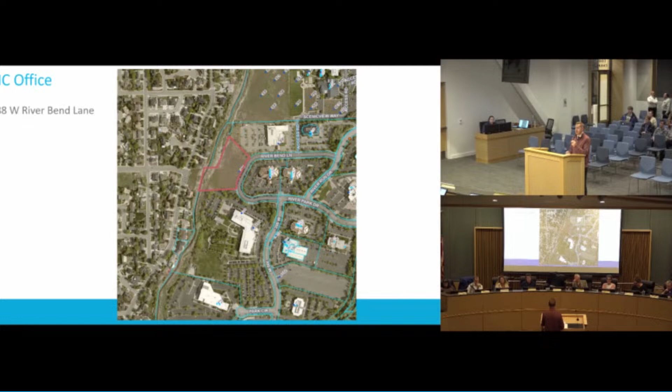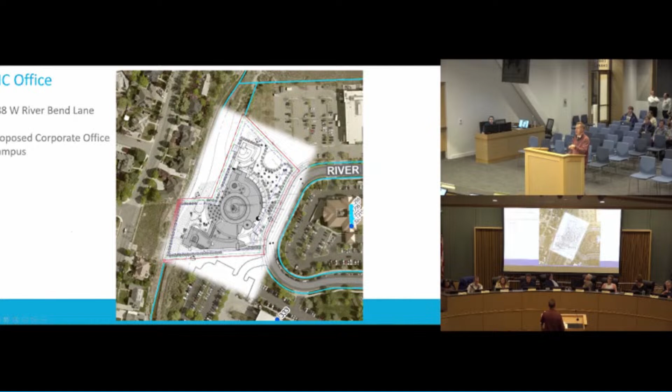So what we have here is the site plan, how it lays out on the property. You can see the main building in the middle here—that's going to be their main offices. Up to the north is kind of the head office, CEO office, meeting space there. And to the south is more of an amenity for the employees. This is all connected through pedestrian walks, and underneath is a parking garage.

So the zone, like was stated, is the RB&P zone. To the north is the PF zone—there's a school up there. That property kind of goes along the border between Provo and Orem, and then, of course, to the west is Orem City.

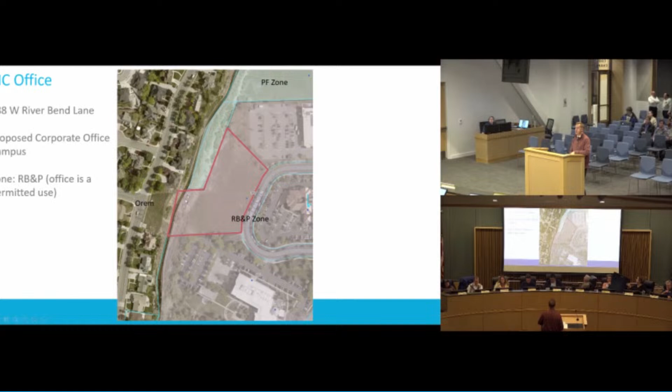The office space is a permitted use. So what we have here is an office building, but not a traditional office building—there's only 22 office spaces within this structure. There are green roofs, lots of landscaping. It's kind of an open and green design.

So that's an aerial view looking towards the west, towards Orem. That's it to the north. You can start to get an idea of building height compared to everything around it. The majority of this building is about 37 feet high, minus the stairwell towers that bring you up to the roof garden spaces—these three here. The majority of the building is just two stories, about 37 feet.

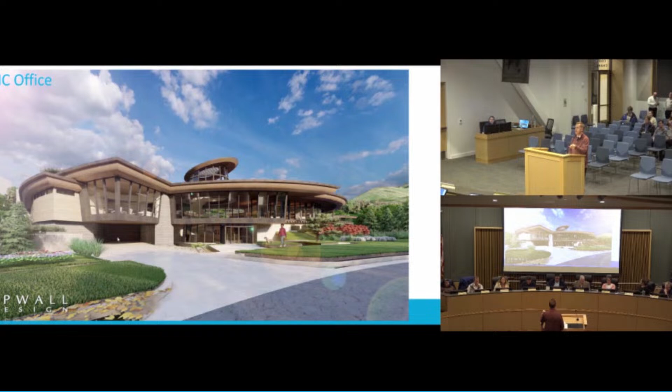And then from the street—this is along Riverwoods Drive—this is what it'll look like from the street. You've got your main entrance there, the parking entrance to the south of that. And then here's one of the renderings for the main central structure. This is the main floor with the offices surrounding; you can kind of see the office spaces surrounding this open daylight amenity.

So there's a few concerns that came in on this one through phone calls. I don't think any came through email, but I did receive a few phone calls. They were all from Orem residents up above this project on the hill to the west, just asking questions about how tall the building is going to be, sound, light, things like that. But those are the only calls or emails we had on this.

This did not go to a neighborhood meeting because it's just a project plan. So only legislative things are going to those neighborhood meetings now. But staff is recommending approval on this. We think it's a great addition to the Riverwoods Business Park. We think that it would be a benefit to the city, and I'm prepared to take any questions you might have.

All right, go ahead if any commissioners have any questions. Is this use for an existing company, like a company wanting to put their headquarters here? Yes, exactly. The headquarters for KMC. They're a real estate management business corporation. This would be their headquarters. Currently located in Provo? The owner lives in Provo. I'm not sure where their headquarters are. Got it.

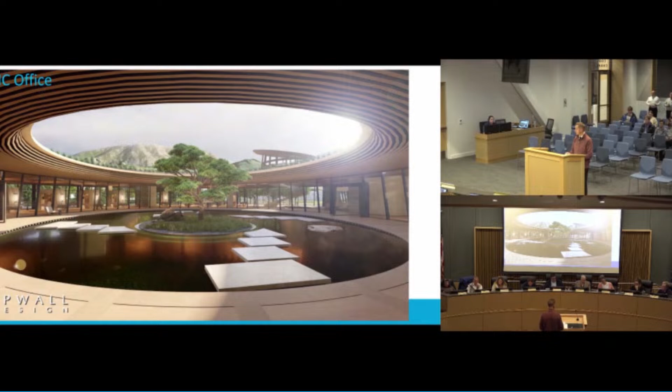The conclusion on the staff report says that the overall value of the building and site far outweighs the small gap in parking numbers that are imagined for a standard office building. Is that the reason we're seeing it, because the parking isn't enough? Why are we reviewing this? It's just because it's a commercial project plan on a site that's over 3 acres. Anything over 3 acres in size comes to you. The gap in parking, the parking standard, is based off of just a blanket gross square footage.

In a typical office building, it may make sense to park it at one stall per 250 square feet. But I think if you look through the floor plans of this, you'll see that there's only 22 offices here. You've got about 5 spaces per office. I think it's sufficiently parked.

Okay, so is that something we would need to give an exception for, or do you have the authority to say we don't need to use the same numbers for parking? Do we need to say at some point that we're okay with the parking? Yeah, that is a key point for the planning commission to decide.

Okay, and then my other question is, I noticed that the parking is underground, and I'm wondering if, right next to the river, that's even structurally feasible to have underground parking. Good question. So yeah, this did go through staff review. Engineering and Public Works have signed off on the project plan for this. There's a full set of civil drawings. Okay, that was surprising to me.

Okay, thank you. I have a question in terms of the size of those 22 or so offices. How large are they? Can they be subdivided further? Is there an end-around where you get under the parking requirements? That's a good question. I don't know the exact size, but looking at the main level floor plan, I don't see a way that those would be easily divided. But I suppose that's possible through a remodel building permit. At which time we would kind of reanalyze the whole project, right, if they came back with a remodel.

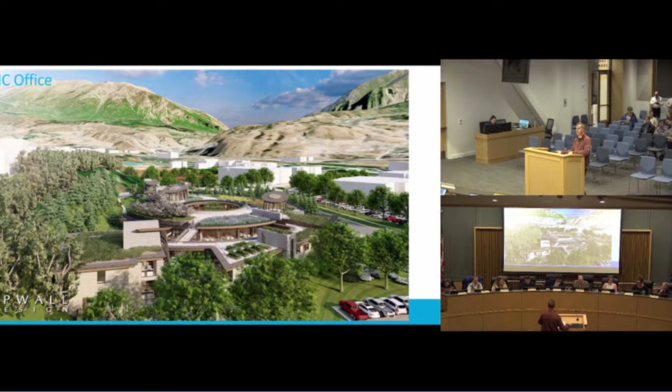One question I have that wasn't super apparent from the sketches, maybe it was written somewhere and I missed it, but the property goes right along the river. It shows that there's like some trees planted at the part of the property that goes along the river. Is there a plan there, is there a trail currently going there?

So yeah, you're probably speaking about that little portion. Yes, this little section. It's not a river, it's a canal. It's the Provo canal actually, private actually. Okay, but they are respecting the distance from that either way. Cool.

And what building is that to the left? Is that Qualtrics or Vivint? South is the Qualtrics offices, yeah. Okay, cool.

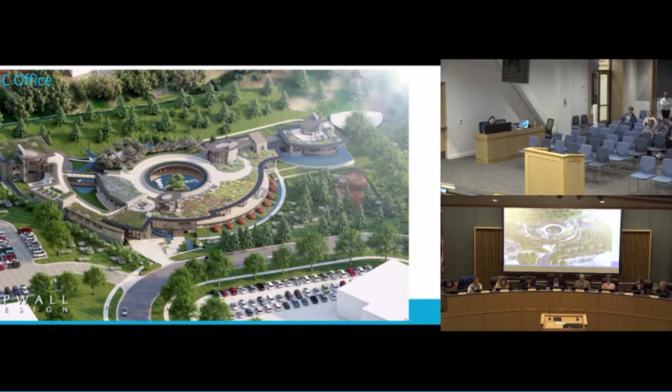I can make a motion on that. Thanks, Jonathan. I move that item 1, Josh Arrington requests project plan approval for a new 75,000 square foot office building on a 3-acre campus in the R&BP zone located at 388 West Riverbend Lane, River Bottoms neighborhood, be approved, with no caveats, but with the addition that we are also approving the building materials.

Any discussion on the motion? Let's go ahead and vote, or do I have a second? I'll second. Commissioner Knudsen gives us a second. We'll go ahead and vote on it. Commissioner Hill, aye. Aye. Aye. Aye. Aye. Aye. All right, item number 1 passes unanimously, 9-0. Let's go on to item number 2.

Dudley and Associates request project plan approval for a new 3-story office building in the SC3 Regional Shopping Center Zone located approximately at 4951 North Edgewood Drive, River Bottoms neighborhood. Mr. Ardmore, could we also read in item number 3? Item number 3, Jay Roberts requests approval of a zone map amendment from the SDP1 Village at Riverwoods SDP Overlay Zone to the SC3 Regional Shopping Center Zone, in order to construct a new mixed-use office and commercial building located at 4951 North Edgewood Drive, River Bottoms neighborhood.

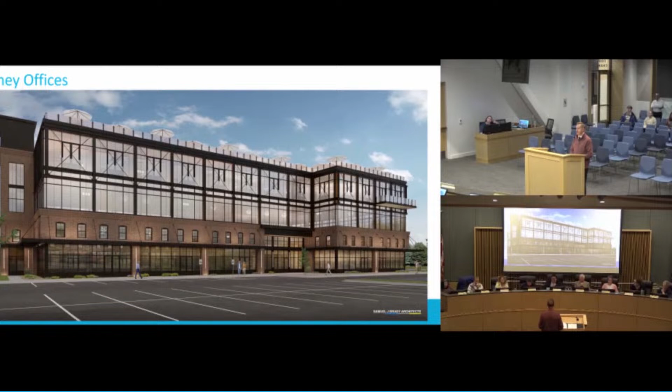Aaron, I have a couple questions. First, just out of curiosity, in the upper right-hand corner, what is that they're showing with the kind of brown and the gray? That's just landscape space. I think it's a ground cover and then just walking paths, trees and shrubs. Okay, just the gray kind of waves - I was curious what that was.

Do you know the distance between the building itself and the townhomes adjacent? Yes, I believe it was over - the applicant probably has this off the top of his head, and would be quick to answer it. But I think it was over 30 feet from the property line to the edge of the building. And then you can see that there's additional setback from the property line to that first townhome, townhome 1 there. So there's probably, I would imagine, about 40 at least feet.

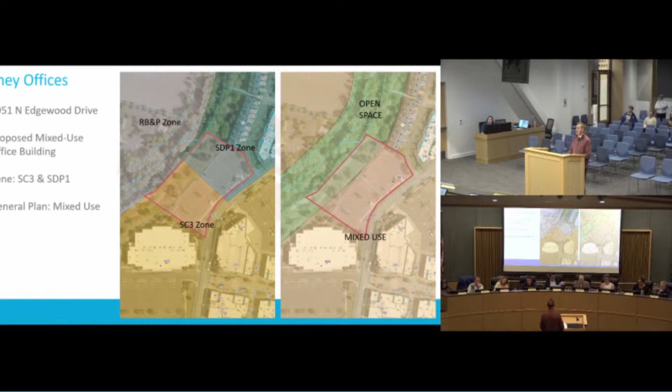On the image to the right, it's outlining the property, but the development only goes up to that mid black line, right? So is it protecting the trail space, or does it go all the way back to the trail? No, you can see how it kind of addresses that. The building and the parking lot stop before you get to the open space. Yep, I see. And then the back, yeah, it's in the open space.

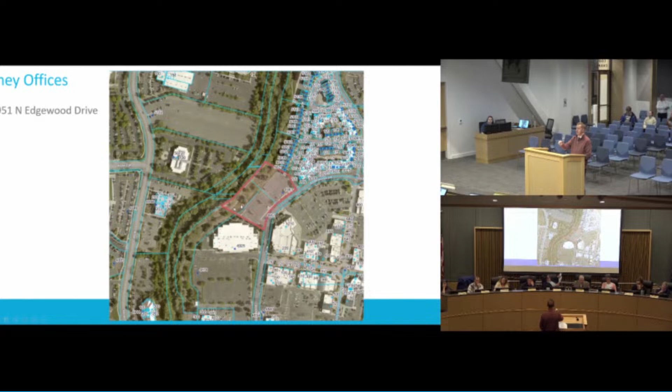Got it. So that open space will be kind of redone in parts adjacent to the building. The trail will run uninterrupted, but they are improving parts of the open space just east of the trail there. Cool. And then what conditions did it fail on the front side?

Just out of curiosity, what conditions did it fail? You said it had a conditional acceptance on the other side. The conditions were they had to finish up the parking agreement, which is the owner agreeing with himself, and then record a plat to do a new boundary on the property south of the theater. From my understanding, as they went to do that plat work, there were some issues, I'm not sure, with the theater perhaps, but maybe that can give you more detail. Is Tigris Woods LLC - do they own these townhomes, or are those?

No, those are homeowner owned. Like those are individually owned. Okay, yeah.

Anyone else have questions? I just was wondering, does SDP stand for anything? What does SDP stand for? Specific development plan. Okay, so just a performance development. Yeah, okay.

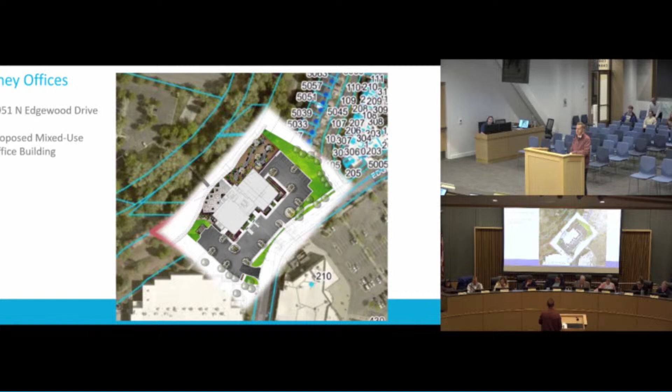Will the applicant please come forward and just state your name and your affiliation? Jay Roberts, I'm a Provo resident and my affiliation is the owner's representative on the project.

Do you have any additional comments you'd like to make on these applications? No, the intent is to beautify the area also in conjunction with the Riverwoods as we continue to master plan the Riverwood Shopping Center. And so allowing a beautiful building such as this to come in and help lift the area and some of the aging buildings there. So that's part of the intent here.

I don't know if you had a chance to see the community comment, but does anyone want to follow up on any questions from that while we have the applicant forward to address any of those on behalf of the member of the public, Brittany Call?

I have one, Daniel. Yeah, go ahead. Just to clarify, do you know what the issues were with that first piece of property? From my understanding, it was issues with the lease between AMC and being able to utilize that extra area, even after many attempts to talk with them and deal with them. It just ultimately led to this opportunity. So we ended up having to move the lot because of those prior lease agreements.

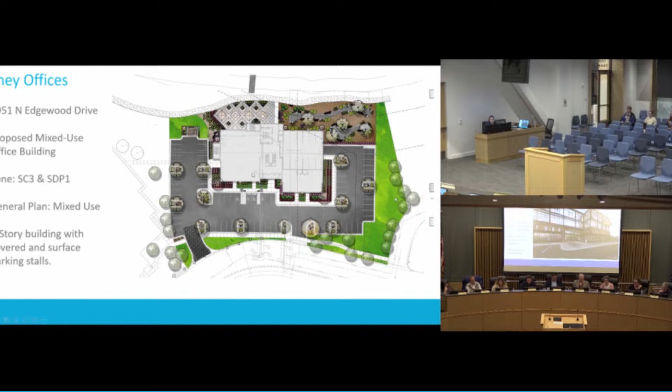Okay, I'll start with item number 2. Dudley and Associates request project plan approval for a new 3-story office building in the SC3 Regional Shopping Center Zone, located approximately at 4951 North Edgewood Drive, River Bottoms neighborhood. I forgot to start with, I recommend that we approve item number 2, subject to the parking agreement and plat being recorded prior to the building permits, and also subject to the zone change, which will be voted on in item number 3, being approved by the city council.

Just kidding, maybe I didn't. You're not recommending on this one. So your motion is to approve with those conditions. Thank you. No problem. Thank you. The wrong words came out of my mouth, even though that's what I was thinking.

Okay, I'm going to start over. I'm not going to read the text of it, but I'm going to restate it. I am making a motion that we approve item number 2 as written, subject, as long as the plat and parking agreement are taken care of and the zone change is approved by the city council. Is there any amendments on the motion?

Any second on the motion? Commissioner Kendall? I'll second. All right, let's go ahead and vote on it. We'll start with Commissioner Hill. Aye. Aye. Aye. Aye. Aye. Aye. Aye. Aye. Item number 2 is approved.